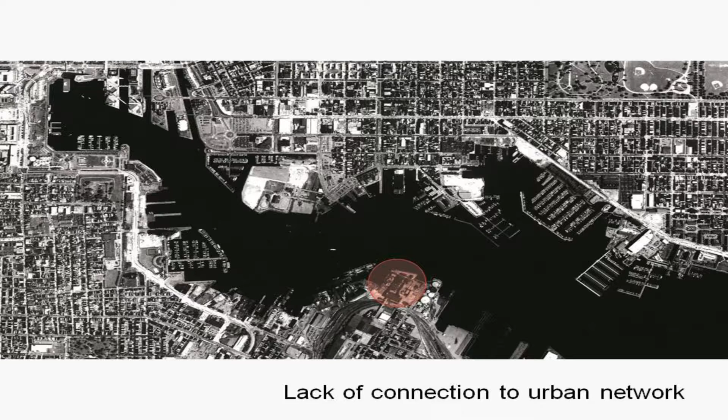When we look at what's happening today on the waterfronts, we find that because of the change of uses, it's very disconnected when you look at it within the urban fabric. This is Baltimore, and the lot sizes are bigger, the streets don't go through. It was industrial, now we're changing it back to multi-use, all the things Martin talked about. So there's generally a lack of connection that needs to be overcome.

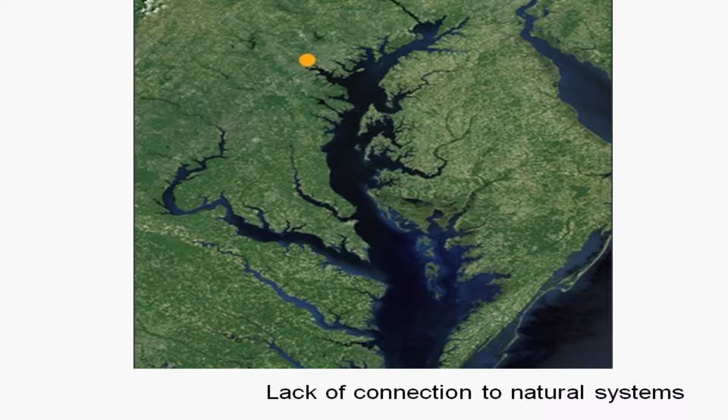And there's similarly a lack of connection at a much, much bigger scale to these kinds of bigger natural environments. This is the same site, the same dot, just looked at a different way - it's part of the Chesapeake Bay, one of the biggest estuaries in the world. But when you visit the site, really neither of these types of places come to mind.

So reclaiming, I think, for us in the 21st century means bringing these two ideas together, that they're no longer about two different kinds of places, that they're really the same place. And how do we do that? I think we've all had a little bit of a wake-up call, both here in Europe and in the United States, with all the recent natural disasters. So it's a perfect time to talk about it.

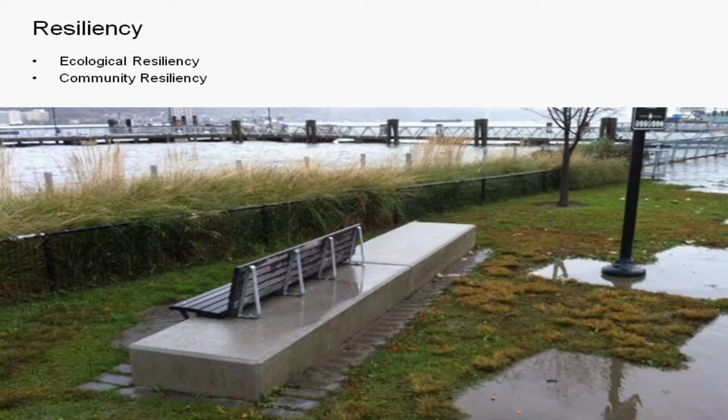So this is one of the sites we did right after Sandy. In terms of resiliency, which is the big word now, there's both the ecological resiliency - you can see it actually did pretty well, it was totally covered with water, but everything's coming back - and then there's the community resiliency. One of the things they found in New York is that community resiliency had a lot to do with if a place was able to bounce back quickly, both place and people.

The other important thing is to have redundancy. You have these different scales to consider when thinking about a place. You don't just think about the water's edge, but also how the buildings contribute, and how the infrastructure and streets, all the utilities, can work together rather than being thought of individually.

So here are some projects. We haven't solved all the problems in our projects, but I'll show you a little bit.

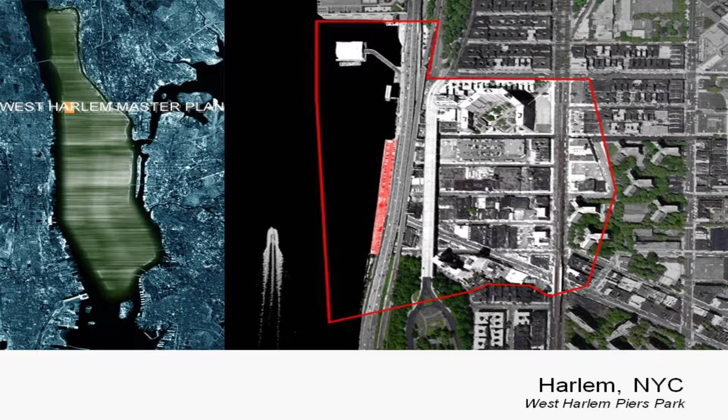This is in West Harlem in New York. You see the yellow dot and the red line around a site. We started as a master plan. It's a valley, and the red site, the long narrow site, is ours. This was very much about community resiliency.

This community very much wanted to be connected to the water. It had been cut off from the water for a long time. They had been working to get back to the water for over 30 years at the point where we joined them to help with their struggle.

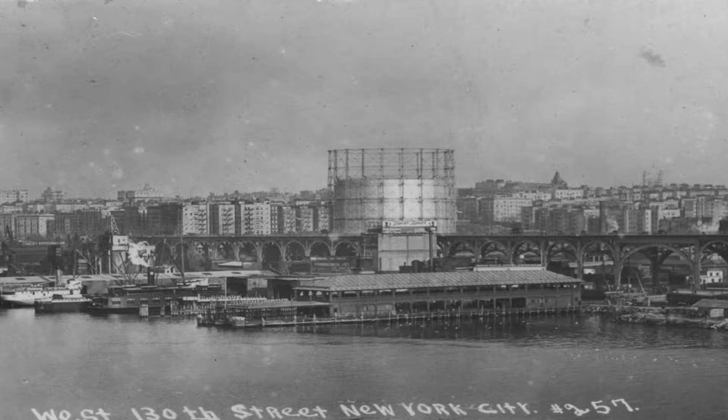This is what it used to look like - a very bustling maritime place with lots of river traffic and industry going on. The historic piers were very important. They didn't exist anymore, but they were still very important to the community.

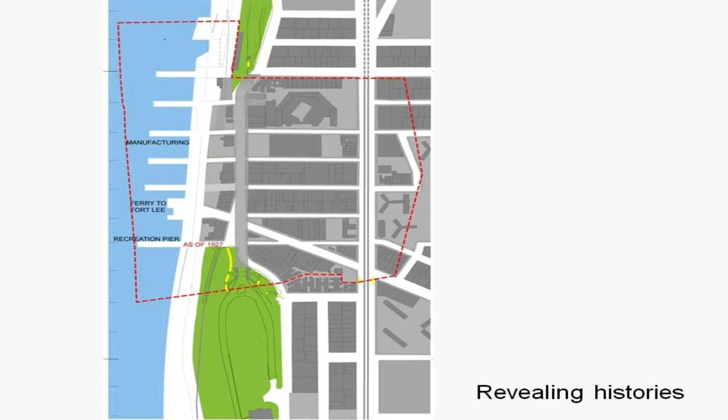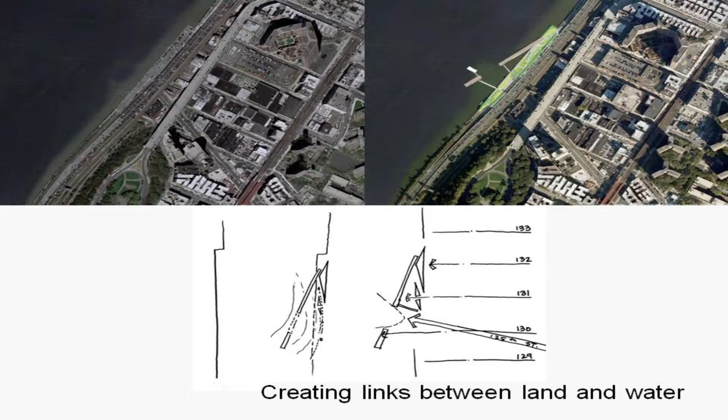As we started thinking about the project, there was no need to rebuild the piers as they were historically, because the uses today are different. So we rebuilt them in a way that reflected as if the water were coming in instead of the city moving out. They're sort of like sandbars, since this was originally a cove.

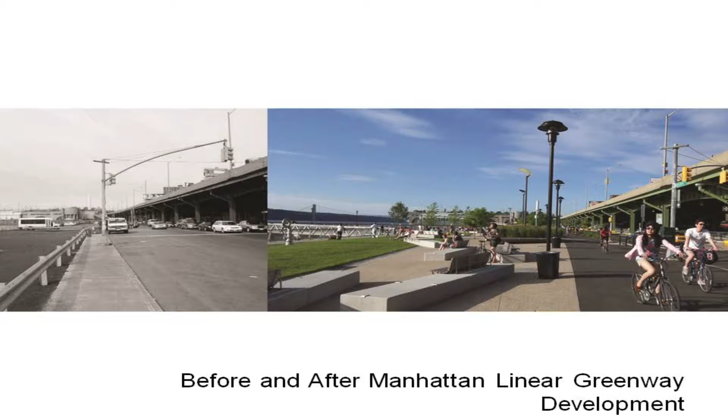This shows we had to deal with traffic engineers and the DOT on narrowing the road, so we had room for a bike trail, which you see on the right side, as well as more park space. We also had a long-term plan where you could close the road completely if you reworked some of the exit ramps. Then there are the neighborhood connections.

The sidewalks go straight right on out onto the piers. You're right in the middle of the water, and you can catch a ferry - there's boat traffic. Looking back from the park, you also look up into the community at certain key entry points, so that connection between the community and the water is really important.

Then there are lots of uses, which all came from community meetings - what did people want to have happen there? They mostly wanted it to be quiet. They didn't want any big uses, but they did want kayaking and fishing.

So we put in a special kayak pier and a special fish cleaning station, plus special features like a water feature for the kids, which on a day like this would be really wonderful - I can imagine running around in it.

Again, these piers, because of their angles, help expand the space. It was a very narrow site, so using these natural geometries of diagonals really gave the site a much bigger character.

They also provided multiple pathways and edges, and people like to hang out along edges, so the more of them you have, the more places there are for people to hang out, as well as bicycles, and places to stop in between the paths so you can see and watch everybody. That's all the social aspects we were trying to improve.

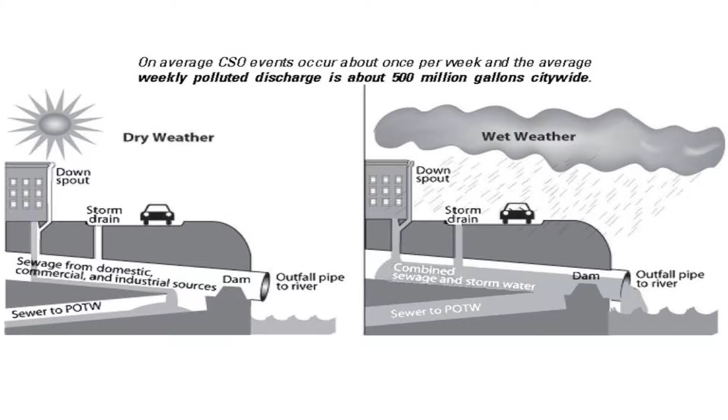As far as other ecological aspects, in New York we have this problem with our storm water system, which, when it rains a lot, the sewers don't have enough capacity, and so we get overflows of water with sewage in it into our rivers, which is obviously not a good thing. So to help with that, the more porosity you have in the land, the better off you are, because the water doesn't have to go into the pipe. It can soak naturally down into the land, instead of being pushed right out into the river.

So this park has a modest 35% increase in permeability. You still need hard surfaces because when you have a lot of people, that's maintainable. But we tried to do as much porosity as we could, so that helps with the environment.

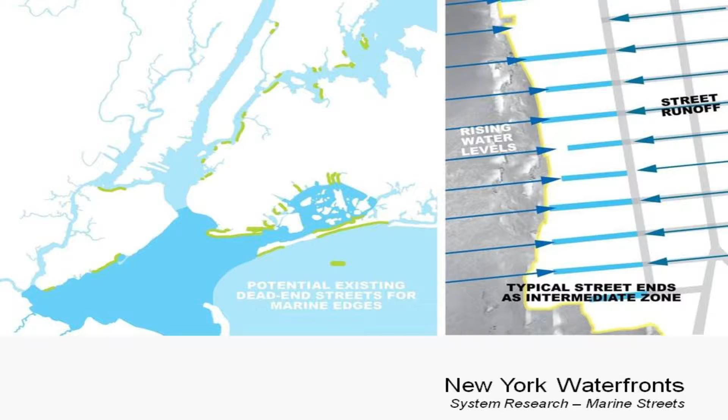This led us to a research project where we noticed there are lots of places where streets have a lot of runoff coming down from the community. In our community, which is also coastal, there's the potential for rising water levels. I took this idea from the Dutch—that's what they're starting to do now. You can take a vacant street that dead-ends at the water, which used to serve industries, and turn it into a pedestrian place for people, where the water can come up it and people can go down.

We actually did this on our next project in the city, called The Edge, over on the East River in Williamsburg. This used to be a street, just like that picture, and now it's a place where people can gather. It slopes down to the river, and will slope down even further in the next phase, until you can touch the water. And this is a section.

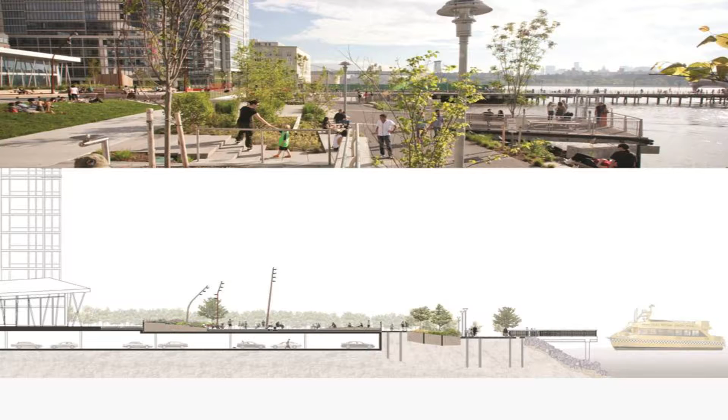You can also hide things. You can use the section to create a natural amphitheater looking at the river, again creating multiple edges to hide things underneath, like parking in this case. It really just gives people a better opportunity to see what's going on. This is what it looks like on top of the parking.

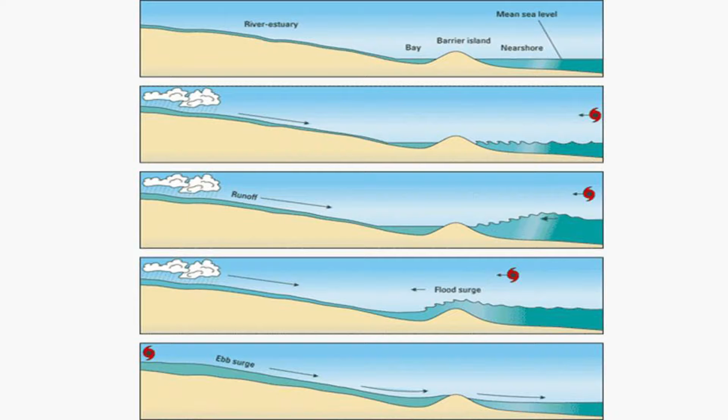The other issue in New York is, again, the coastal condition—we have the coast as well as the tides. This is Sandy, obviously a coastal event, and we lost all that electricity. People were out of work and out of their places for weeks to months. $60 billion or more, and still counting. So it was a real tragedy.

A lot of this goes back to that picture I showed at the beginning with all the green—we used to have, just in Manhattan, over 1,000 acres of wetland. Right now we have less than 100. So there's no buffering to stop any of the storm surge.

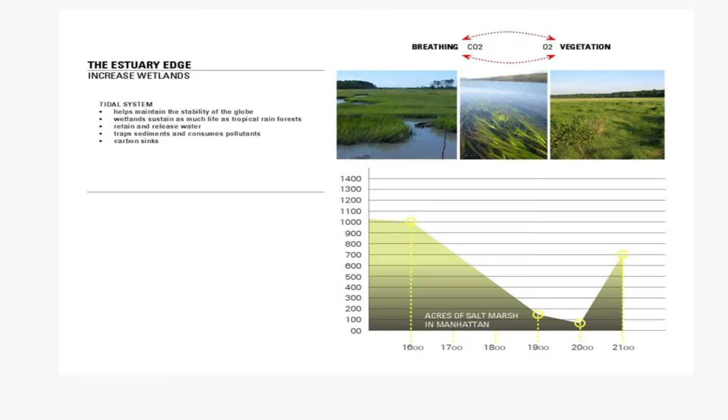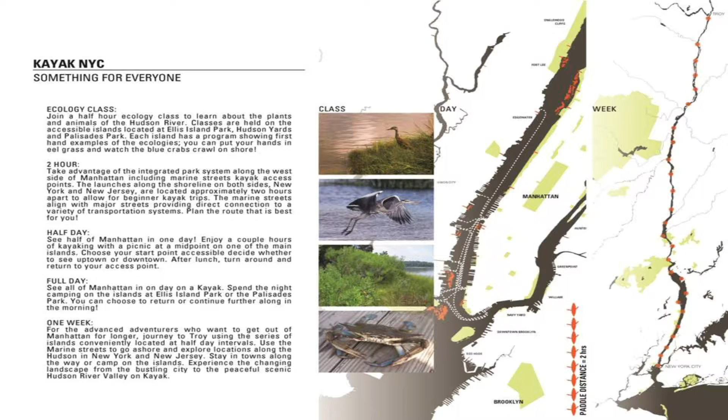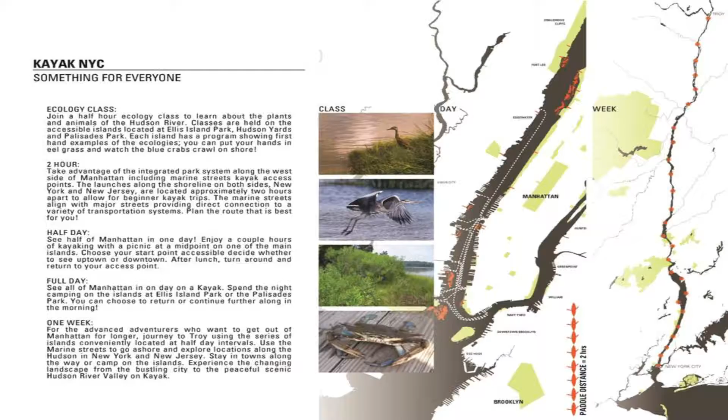So this is another research project we did in New York for the Center for Architecture, where we took the dredge that they're continually dredging out of the harbor for the ships. We talked to some boaters, and they said the Hudson River is just really so wide—there's no places to rest and stop, no places of refuge. So by making little islands up and down the Hudson on both sides, you can make it a much safer place to kayak and much more friendly for people, but also much more friendly for animals and help with storms.

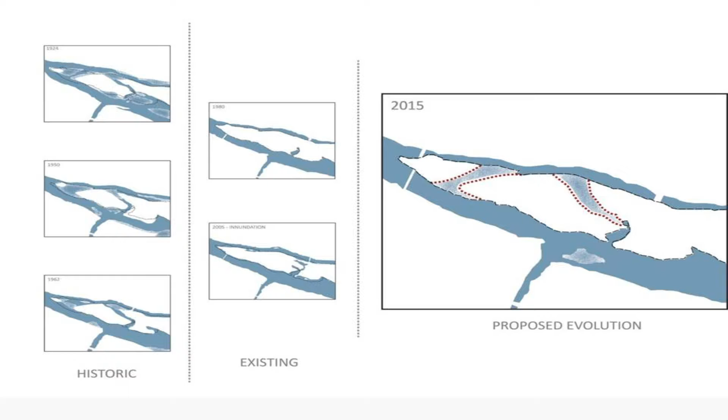So we studied the patterns of the river as it used to be, and found that it actually used to be a series of islands that had been filled over time, which people just didn't remember. So our project was to take that back, actually adding channels that people could go into and explore, because they're controlled and safer than the actual currents in the river. So people can play with the water, explore, and find things.

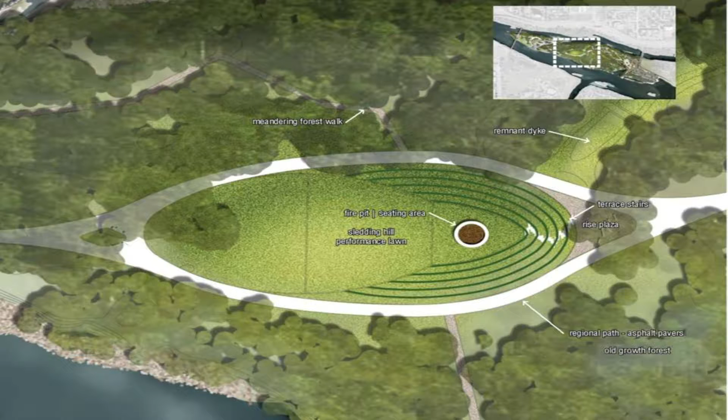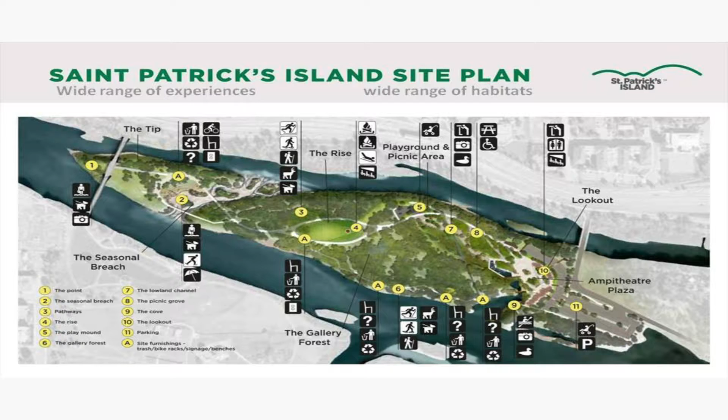We took the land that we scooped out to make those channels, and we're making a big hill in the middle of the island, which people can sit on and look back at the city and have wonderful views, or they can sled, because this is in Canada where it's cold. There are many activities, but it's still basically an ecological park right in the middle of the city.

So I will end on this: the really important thing is to bring all these different issues together anytime you do a project, and try to find ways to find intersections between them, so that you're always helping out little by little on all these big problems that we all face.

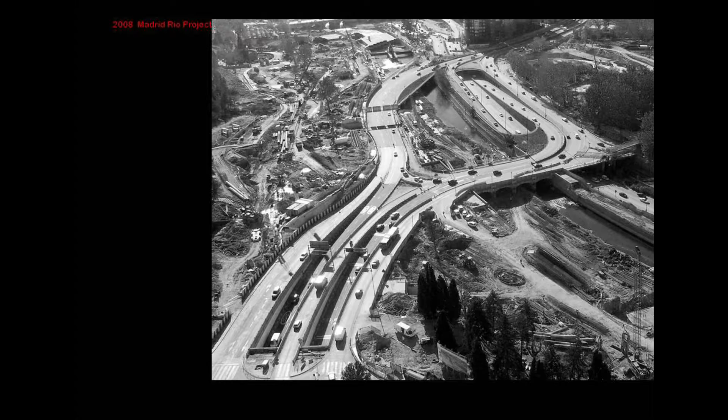Well, 10 years ago, the city council decided to renovate this first ring road, because it had been built in a very informal way — just running behind the demand of traffic — and the junctions were very badly designed, sometimes using the streets of the urban tissue to make the connections. The city council decided to renovate the east part of the M-30, what we call the first ring road of Madrid.

And along the borders of the river, the city council decided to cut and cover, to make a tunnel along this stretch, between 6 and 8 kilometers, where the highway ran along the riverbank. They built this incredible and extremely complex work in 4 years.

So something really like a miracle.

We can see here an image of this process because, of course, they make the tunnel under the highway, but without cutting the flow of traffic. So it's something extremely complex.

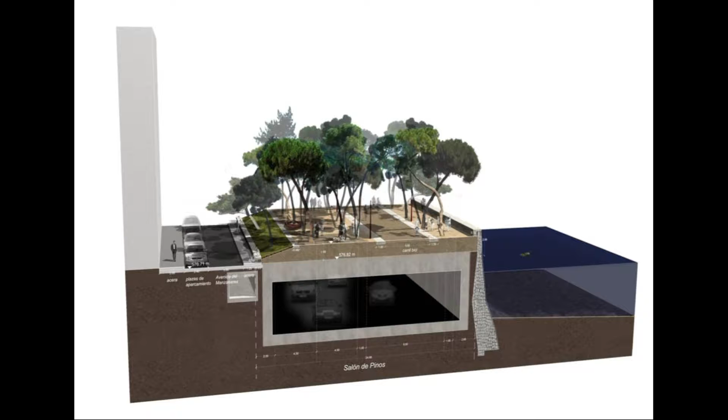Okay, thank you. This is the section that we can understand, we are going to repeat along the right side with the pines over the highway. And this is the final image in which we can understand that the highway is under these pines.

Well, this is, I understand, like making the project comprehensive for the people, and strong and with some kind of unity, so you can run or you can walk along the river, feeling the same atmosphere. This is another image of the place, in which there are benches and many amenities that you can use.

The second part is the historic connections, and I'm going to show you very briefly, because we find some traces that are very valuable over there near the Royal Palace.

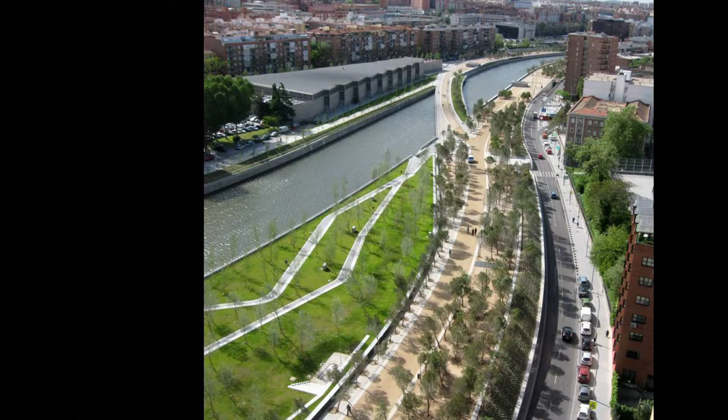And this is some images of the gardens that we designed in this part, trying to understand what's happened here with the history. And the third part is what we call riverbed memories, trying to make a fiesta with the water, because Madrid is a very dry place, but the river has historically had meanders and lakes and so on.

And we designed a park trying to build or reinvent in some way this atmosphere of the riverside, of the riverbed that it was, I don't know, 1,000 years ago.

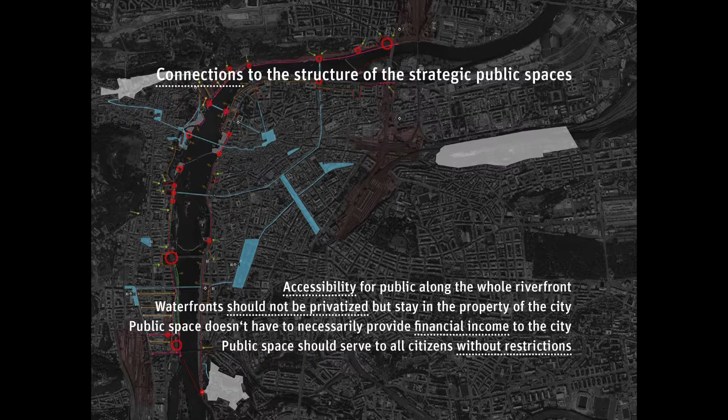It is necessary for the riverfront to be accessible and understandable in the broader context. The river is also a natural communication artery that should not be hampered by barriers. But it should stay open to cyclists, not necessarily to cars.

Our designs, our projects for the riverside developments rely on the definition of the ideal situation, part of which is that the riverside and the immediate areas should not be privatized, allowing for functions that would not be in line with the city's objectives and plans for the river.

The river in Prague, in its central part, is a regulated urban space, and in the outer parts of Prague, because the river flows through the city—not only in the middle, but also through the outer parts of Prague—the character of the outer riverfronts is also very good.